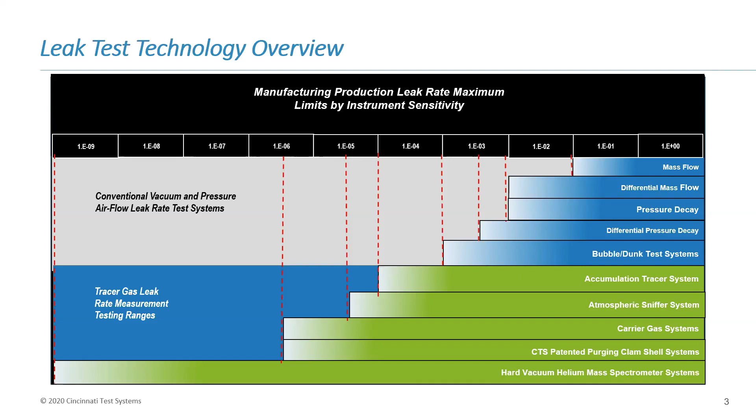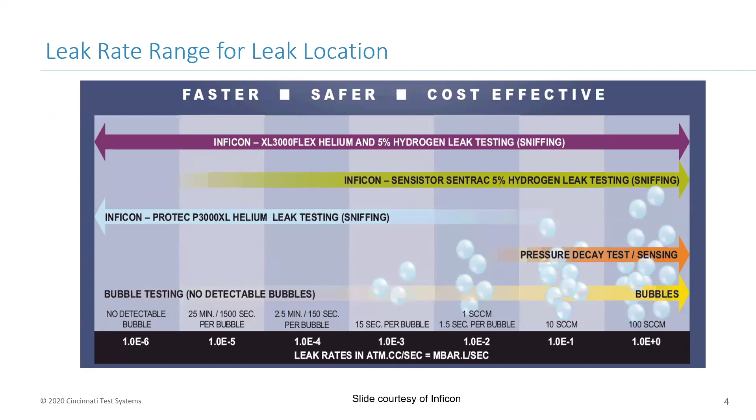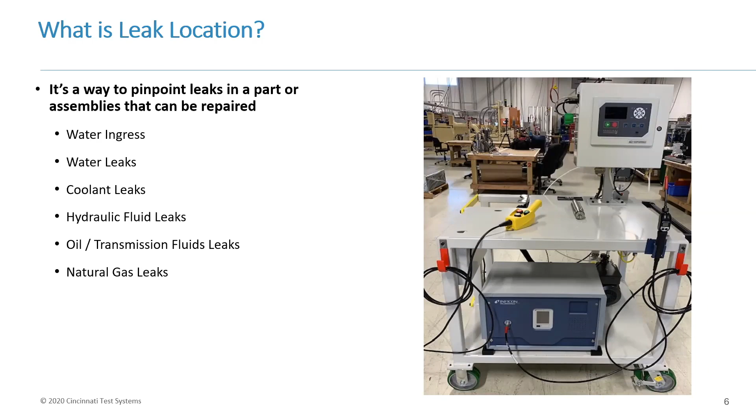So the principle of operation of leak location. First, we're going to evacuate the part, so when we backfill with the forming gas or helium, which is the next step, we'll be able to find that leak quickly. Because if not, we're just pushing the trace gas in over top of the air that's already present in the part. And therefore, before you start actually sensing any tracer gas coming out that hole, you're going to have to displace all the air that's in there first. But if you pull vacuum, you're getting rid of all the air. Then when you backfill, you're able to pick that leak up rather quickly.

And once your part is charged, you're going to use the sniffer wand to go around different joints, different weld joints, different areas of the part that you're interested in trying to find a leak on. The sensitivity range of leak location with good background control is down to 1 × 10⁻⁵ cc's per second. And that's based on the wand movement. So if the operator moves the wand around too quick, about the best you can hope to pick up is gross leaks.

But with a 300 cc per minute flow, you go 3 inches a second. Or if you're using a high flow sniffer, which is 3,000 cc's a minute, then you'll be able to pick up something. You can probably move at least 6 inches a second.

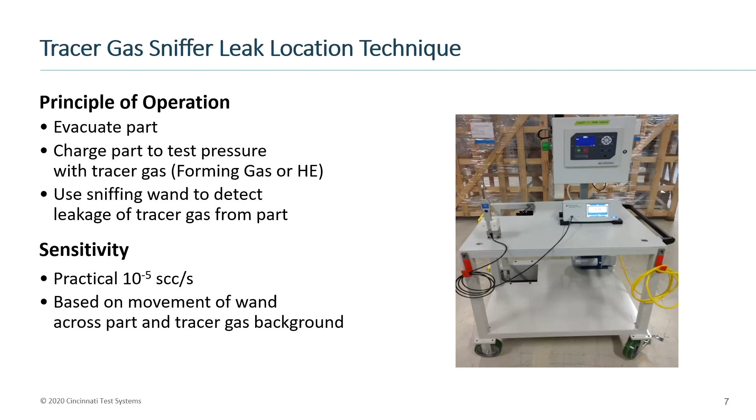And to verify that you have a leak, you go in and find the leak, and then you back away and you go back in just to make sure it's not a ghost signal, make sure it's not just background that's setting the leak detector off. Some of the applications for, and so we're only going to cover each one of these as kind of a 90,000 foot view. We're not going to go into great detail, but just enough that you can see the difference between each trace gas technology.

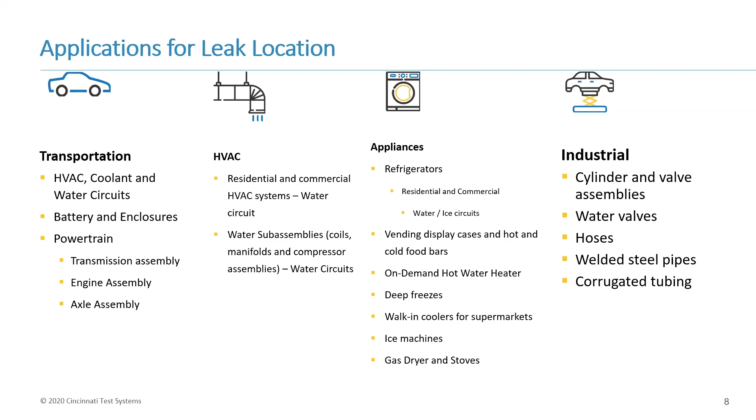What we're doing is the clamshell itself has an inner purge and an outer purge. The inner purge comes on at the beginning of the cycle when you're evacuating your part and pushes all that contaminated air inside the clamshell out. And then you get your outer purge ring, which is a very low pressure of nitrogen that keeps that background from going back into the inner purge. So it's like putting a mini clean room around the joint or area of the part that you want to test. So like it says here, the purging clamshell clamps over the component around joints and fittings and reduces the environmental effects that you would see with open air sniffing.

It's got a sensitivity level down to 1 × 10⁻⁶. It increases your sensitivity and improves the leak detection accuracy. And it comes in various shapes and sizes, which I'll show you in a few slides. For the most part, it's designed for manual operation, although we have put clamshells on end-of-arm robot tooling as well.

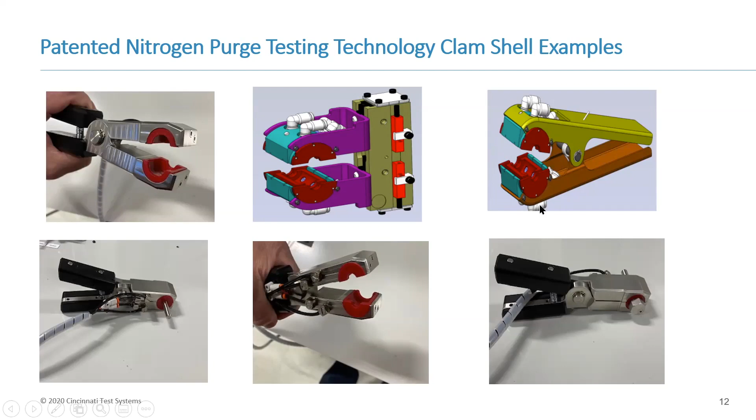I like that design. Yeah, and here's the latest and greatest design of those clamshells right here. They're a lot smaller than the ones that you saw on the previous slide. And these are good for HVAC systems, for cars, trucks, where you've got the braze joints, fuel nuts, anything that you have a joint that you can go around that you're trying to leak test with trace gas, purging clamshell is ideal for that.

On the HVAC side of things, residential and commercial HVAC systems, where you've got your braze joints getting brazed together or coupled together, the clamshell can clamp right around those, and you can effectively have multiple clamshells on multiple joints and test those at the same time, or you can sample each one of those clamshells individually if you want.

And then when you get over on the appliance side, like your refrigerator, you've got your sealed side, the back side of the refrigerator where you've got your compressor going over the evaporator and all that. You can clamp the clamshells on those. And then a lot of your on-demand hot water heaters, deep freezers, walk-in coolers, things of that nature are going to have coils that are brazed in, or just the ends of the coils themselves. You can place the clamps around those and essentially do the same thing.

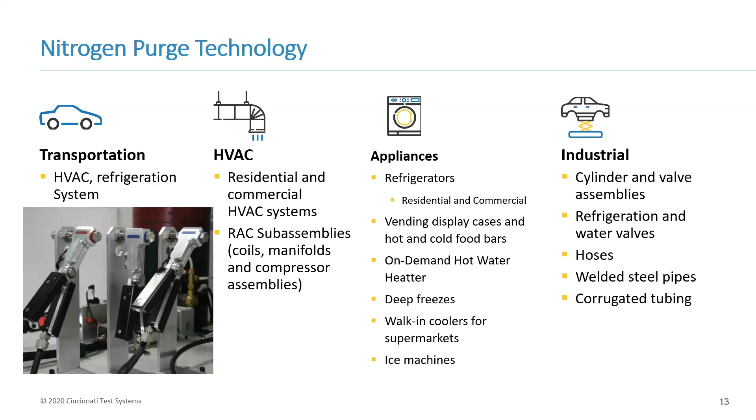So now we're going to get into trace gas accumulation. I know we're hitting this at a very, very high level. If Russ would want to come back and spend some time on each one of these technologies later on in a seminar where we can do an in-depth, for people that may be interested in leak location, purging clamshell, accumulation, or hard vacuum, we can do that. But like I said, we're just doing a 90,000 foot view, showing you what the differences between the different technologies are.

So we're going to be pumping fresh air in one side and then pulling it out the other side. That's to get out all the contaminated air that's inside the chamber. We're trying to get that environment down below our reject point. Once we get that down below our reject point, we will stop flowing air through the enclosure. We'll stop pulling vacuum on the part, and then backfill the part with trace gas.

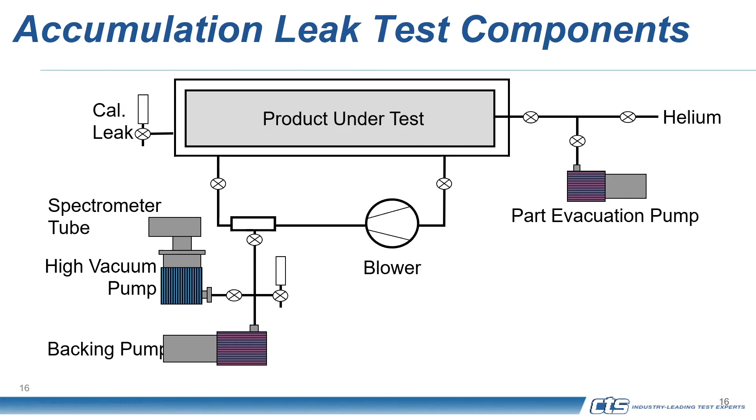Then at the very end, we're going to isolate the mass spec again, and we're going to vent the chamber. We're also going to vent the part, and re-evacuate the part. So it's got much the same sequence as the purging clamshell. You're cleaning up the chamber, you're evacuating the part.

Once the part is down below vacuum, once the chamber is clean, down below the reject set point, then we're not circulating any fresh air through the chamber anymore. We're just sitting there allowing the leak detector to draw a sample out of the chamber, and at that point the part's filled. And at the very end, pass or fail, we dump the gas out of the part, re-evacuate it. We also run some fresh air through and clean the chamber back up to prep us for that next production cycle.

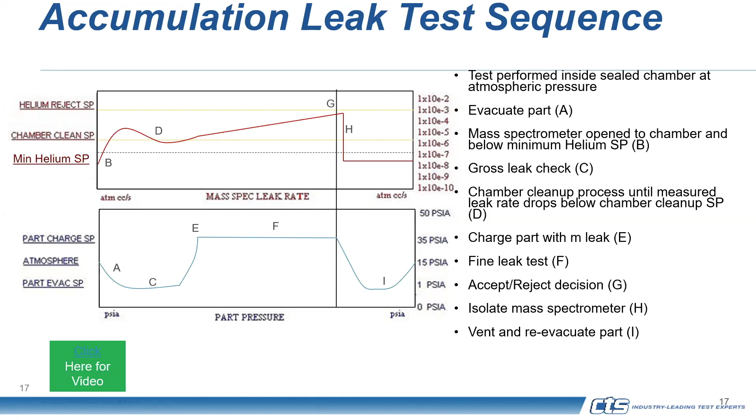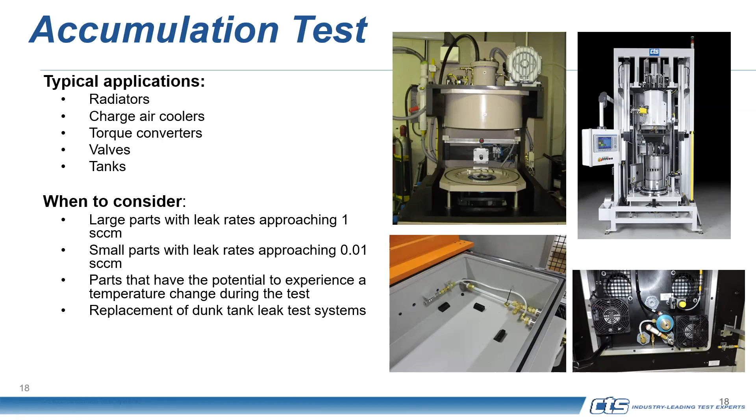And it's also a good replacement for a dunk tank. Yep. Instead of using a dunk tank, you could use open air sniffing, or you could use accumulation. We also had an application, Jeff, you may remember, where they were using pressure decay, but whenever you pressure the part, there are internal components that would move under pressure, and took several minutes for them to stabilize. So instead of pressurizing the part and measuring a pressure decay or pressure loss, we switched to this type of test, an accumulation test that worked out great, a lot shorter time.

Right, exactly. And it's like Chris said, on parts that balloon that are problematic for doing pressure decay. Here we're not measuring a pressure change. All we're measuring is a concentration of gas that leaks out of that part into that chamber. So if you have a part that expands and it's really bad for pressure decay, mass flow, accumulation is a great way to go. Yeah. Or if you've got a really small part with a leak rate that's below pressure decay, but not quite to the point where you'd want to use like a clamshell or something like that, that's good for accumulation as well.

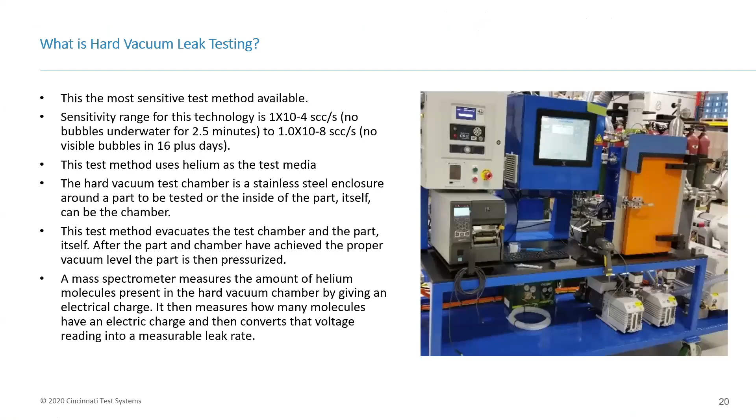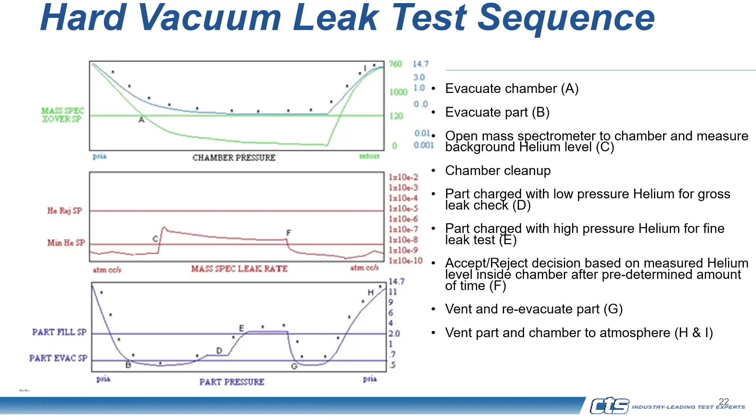If it passes or fails, that will end the test. At the very end of the test, we vent the part and re-evacuate the part to get rid of any residual helium so we're not contaminated for our next production cycle. And we also vent the chamber at that point. A lot of times we will also push nitrogen back into the chamber to get rid of any residual helium lingering from the cycle. I think it's important to note, to actually evacuate the helium outside of the room, outside of the area where you're testing, even outside of the building, so you don't contaminate the area.

That's a good point. With any of the 4 different technologies I've talked about so far, when you go to dump the helium out of the part, you want to dump it out of the building. So it doesn't matter which trace gas technology you're using, you always want to vent the part out of the building.

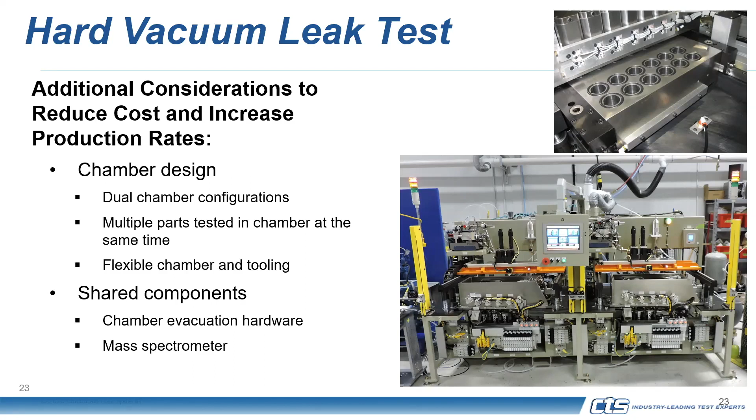And some of the things we take into consideration when we look at cycle time and testing multiple parts: do you want a dual chamber configuration? A chamber where you can test multiple parts? Do you want to share components, like a vacuum pump or a leak detector between 2 chambers, or not? Those are things we look at with a hard vacuum system, because it is the most expensive test technology that we have, and it's also the most sensitive. So when we design a system, we look at the customer's budget and throughput, and that helps us build the system the most economical way we can, based on the leak rate and the throughput of production.